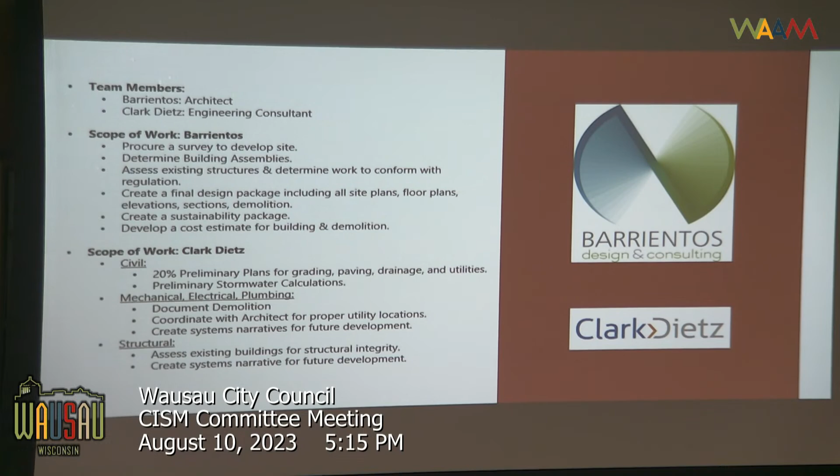Barrientos has been working with the city of Wausau for the last 5 years. In 2018, we performed a facility conditions assessment as well as a space needs study. Then in 2021, we teamed up with Mercury, and they determined that it might be more efficient if the motor pool division and DPW operations acted separately. In 2022, our team evaluated other sites throughout the city to determine the best for each scenario. And today, we are presenting our development of the repair facility.

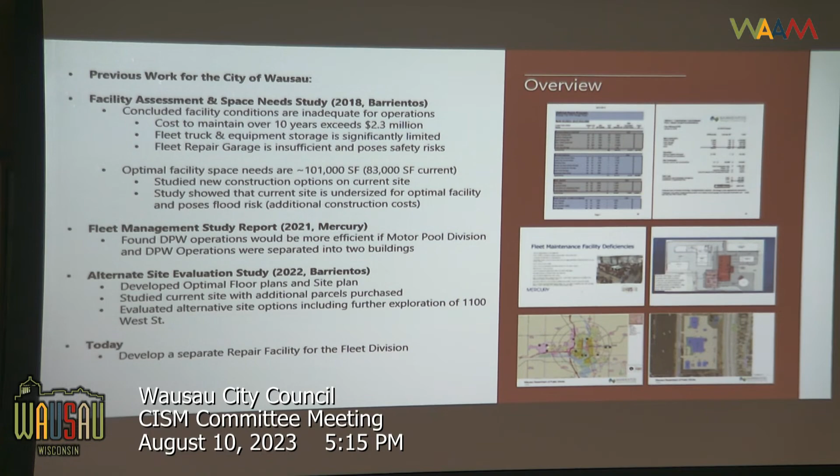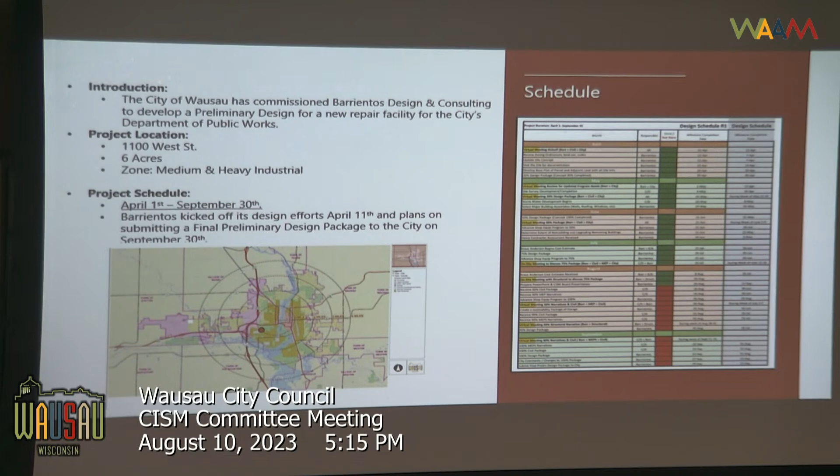As an introduction to the project, the city of Wausau has commissioned Barrientos to develop a preliminary design of a new repair facility. This location is at 1100 West Street. It is 6 acres and is zoned as medium and heavy industrial right now. Our project schedule began April 1st, and we are set to conclude work on September 30th.

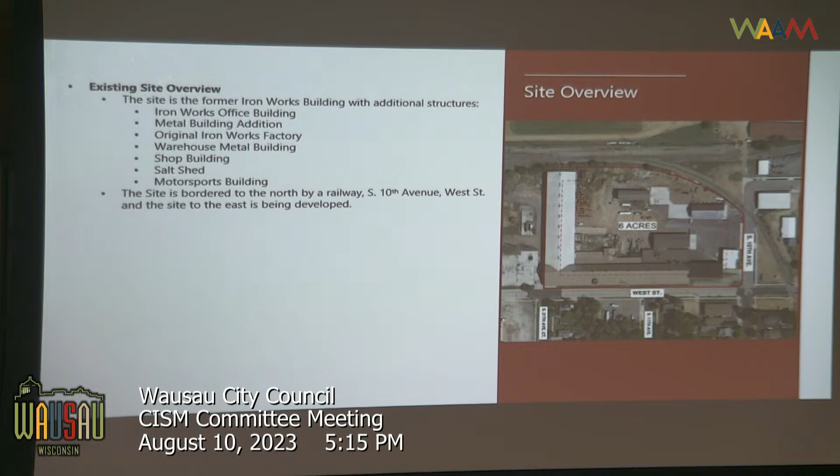The existing site, as you can see on the image, is the old ironworks. It has several building typologies, including the office building, a couple additions from a metal building and a warehouse. We have the old ironworks factory, as well as a separate shop building, salt shed, and a motorsports building. The site is bordered to the north by the railway, to the south by West Street, and to the east by South 10th.

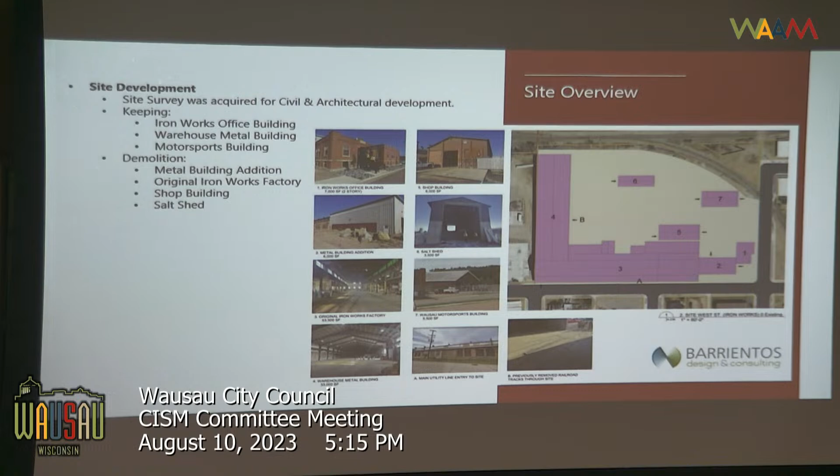Our site development so far: right now we are looking to keep the existing office building for the ironworks, the warehouse metal building, which attaches to the old ironworks warehouse, and the motorsports building, which will act as a storage shed. We are proposing to demolish the ironworks warehouse, the salt shed, the shop building, and the metal building addition.

Here's a map of the demolition compared to what we want to keep. What's highlighted in blue are numbers 1, 4, and 7. On the bottom right you can see the office building, the top right the storage shed, and on the top left the big metal frame structure. These are what we want to keep.

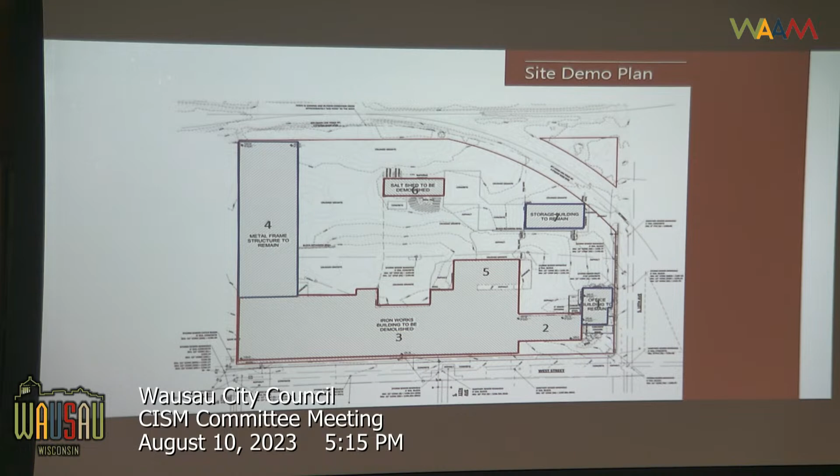And we are proposing what's highlighted in red, which is basically the old ironworks building and the salt shed, number 6.

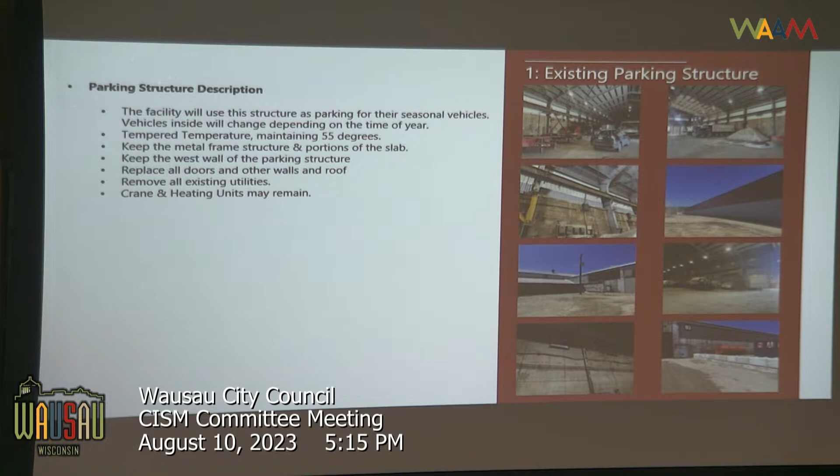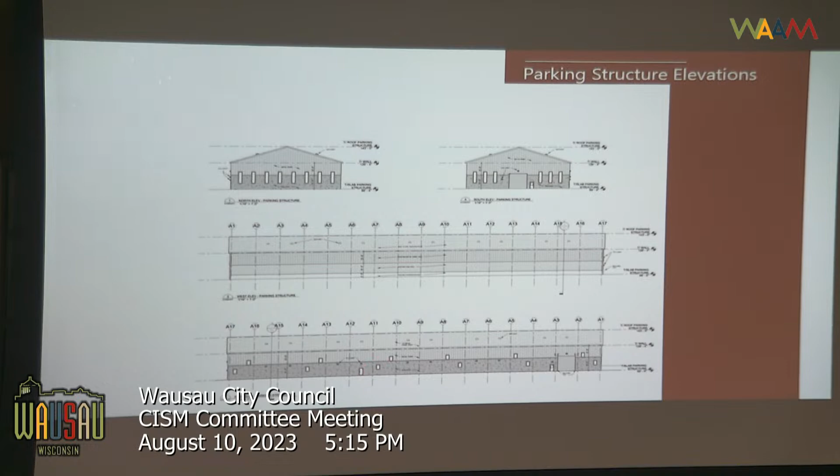All right, so we're going back to the same area—it's kind of hard to see, but now I'm going to discuss the existing office building. Basically, this portion would serve all admin and crew functions for the facility.

Our biggest determination is to make this building ADA compliant. There is no elevator in this existing building, so we would propose adding some sort of elevator or simple lift to make it accessible for anybody. The first floor, the basement, would have direct access to the shop and all the crew functions, while the top floor, the second floor, would have all administrative and private offices.

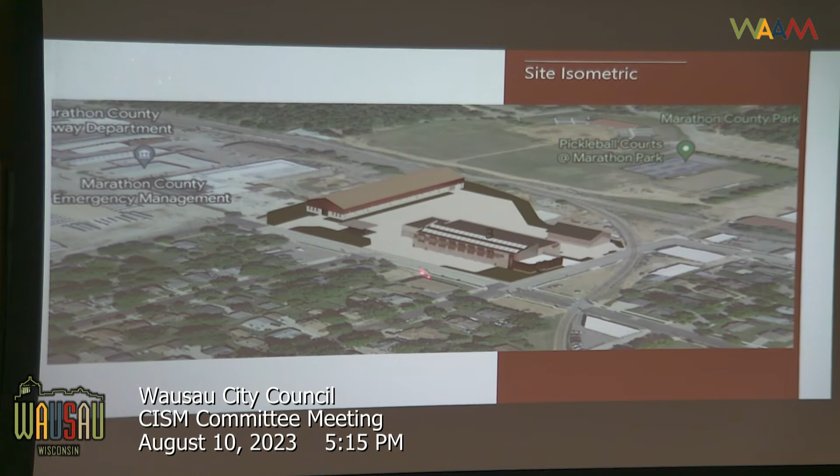So now I would like to discuss our last one, which is the big repair facility in the middle. Basically this will include all repair functions, including all repair bays, wash bays, and welding. We would like full heating and cooling temperature control, so air conditioning as well as heating in the winter.

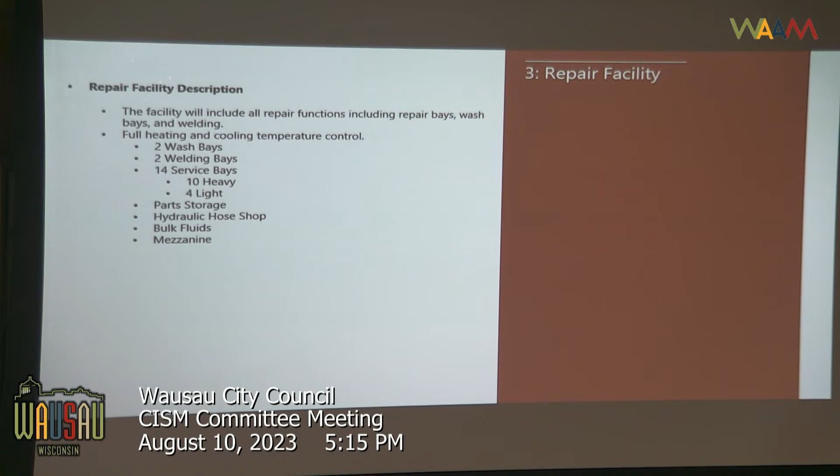We are proposing 2 wash bays, 2 welding bays, as well as 14 total service bays, which will include 10 dedicated heavy duty bays for things like plows, and then 4 light duty bays for pickup trucks. There will also be an area for parts storage, hydraulic hose shop, bulk fluids, and a mezzanine above the shops. This is our working plan. Over on the right is that existing office building, and that lower level directly attaches to the repair shop. I'll start on the left.

These are our two proposed wash bays. We have one automatic, which you just drive straight through like a car wash, with an underbody wash too, getting the bottom of the vehicles as well. This is the manual wash bay, which also might include an underbody wash, but then there's also ability for just manual washing in there as well.

Directly connecting to the wash bay, now we get into the main shop. This would be the welding area, and then here's our 14 service bays. We are currently showing 4 lifts: 2 in-ground lifts, a 4-post lift, and a 2-post lift here. Everything over here includes our parts storage and bulk fluids. We have our supervisors and file storage offices here, and then general mechanical, water meter room, and mechanical and electrical rooms as well to service the new building.

This is our first iteration of elevations. Basically what we're showing on the top is almost like a half sawtooth design. Facing the south, we would like this roof to be sloped just because in the future, if you did want to put solar panels up there, we would like to give that option for direct good sunlight facing the south. To the right, we are proposing it to be flat, which if you put it far back enough, you could put solar panels there as well. But because we want to have as much natural lighting as possible, we would like to add a clerestory here in that division, which you'll see in an image shortly.

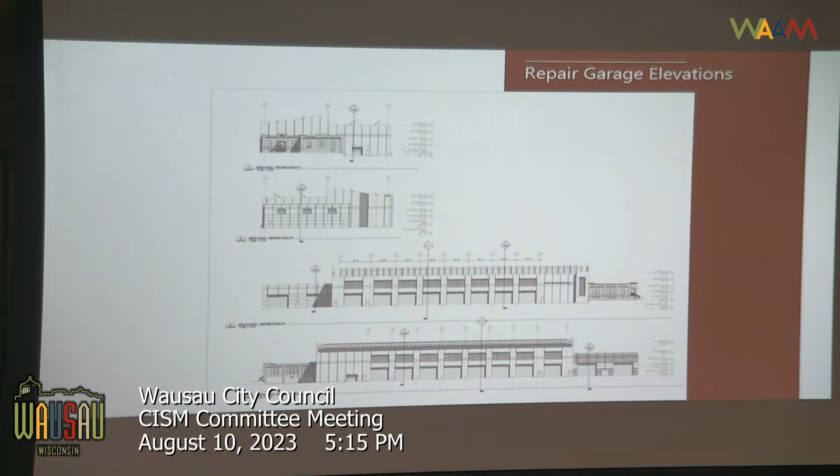So here's our first iteration of the renderings we did. We have received comments from the city, and we are currently working on making updated images just for their preferred aesthetics. But here you can see our clear doors and large windows above. This entire building would be precast preferably, and then you are showing a larger window, kind of signifying that connection of the office building to the new building.

Here is a southwest image. So now you can see the wash bay, how it connects to the building. And here you can better see that typology of what we're trying to do here with the clerestory. Here's our first interior image. Obviously, you're not seeing the structure in there yet, so this is what it could look like, with as much natural lighting as possible, as well as having that clerestory facing the north.

So these are our first iterations of the cost estimates. We teamed up with Wolverine Construction, based here in Wausau, and they performed a demolition assessment of our work in the parking structure as well as on-site paving and everything. Their total came in at $1.4 million.

To the right, you're looking at our building cost estimate. We teamed up with a construction consultant we've worked with in the past, and we received this yesterday, so this was our first time seeing these numbers. Their proposal for the total cost would be just under $24 million.

Combining all of that, we're looking at a total of just over $25 million, including demolition and building. This does not include purchase of the property or consultant fees. That is it, thank you. I'd like to open it up to anybody for comments or questions.

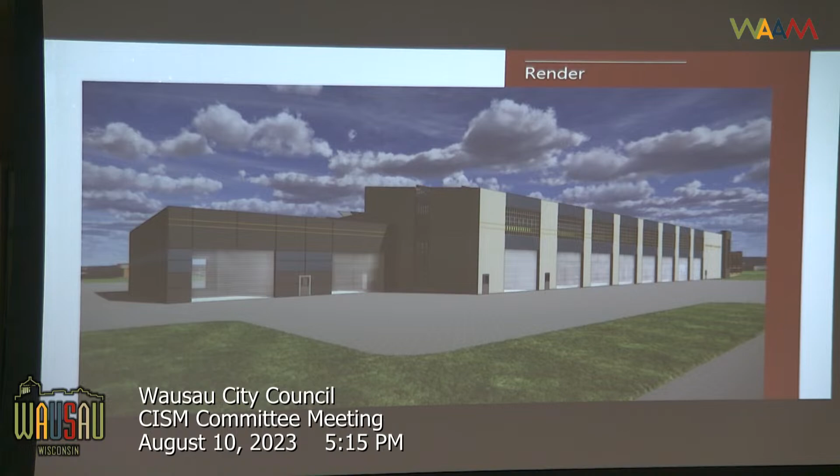Sure. Eric, correct me if I'm wrong—currently you have 8 to 9 mechanics, is that correct? Yes, that is correct. So normally our standard is to have 2 repair bays per mechanic. If we have 9 mechanics, that would be 18 total bays.

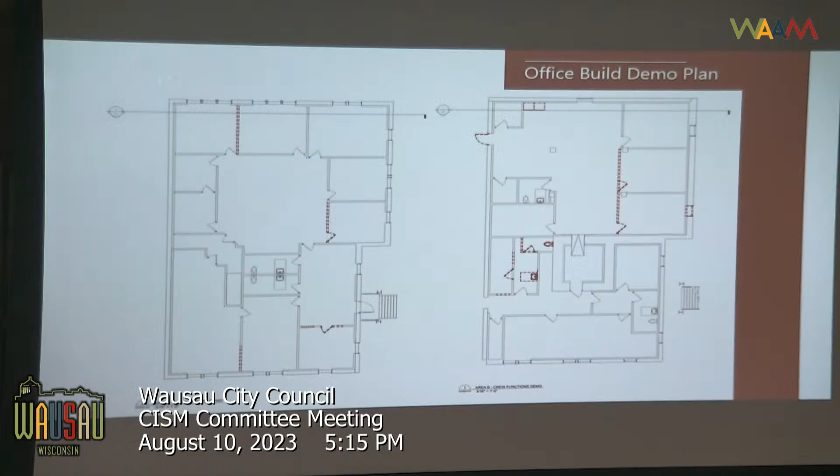However, with the width of the site—if I jump back to the site plan here—if we add bays at our standard width of at least 26 feet, that would add another 50 feet to the width of the building. And if we want the fuel station right in the southwest corner, that would compromise that section. So we went with a goal of about 1.5 bays per mechanic. With 9 mechanics, that comes out to about 14 to 15 bays, so that's where we came up with that 14 number.

Another question: when I toured the facility, one of the workers' biggest gripes was hoses laying on the floor that they trip over when doing oil changes. Eric and I toured the Peterbilt shop a couple years ago, and they had all their fluids and hoses hanging up above so nothing was on the ground. Can you explain how that's going to work in this new facility?

Sure, if you look at this image, what we're proposing is what you're talking about—all the bulk fluid lines mounted off the crane columns, which will be structural columns. Our goal is to keep everything elevated and off the shop floor to minimize that issue. We'd run those lines overhead onto the roof, then down the columns to the bulk fluid assemblies. When a mechanic needs to use it, they'd just pull it down, which should minimize its effect on the shop floor.

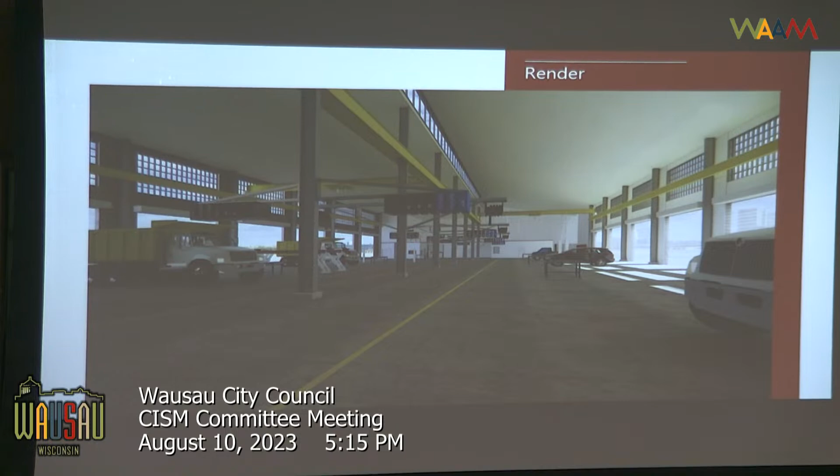Thank you. Any other questions from the floor? Just one—how many service bays are in the current building we occupy today? Was there 6? So, 6. Even from 6 to 14, what a dramatic difference.

I think in terms of size, does the current facility include locker rooms and shower facilities? We do have locker rooms and shower facilities. I wasn't sure where we were at with that. And we do have male and female accommodations at that facility now, because we've had trouble at the firehouses with that. Correct, we do have both. Okay, that's good, just to make sure we're not missing anything there. That was my only question.

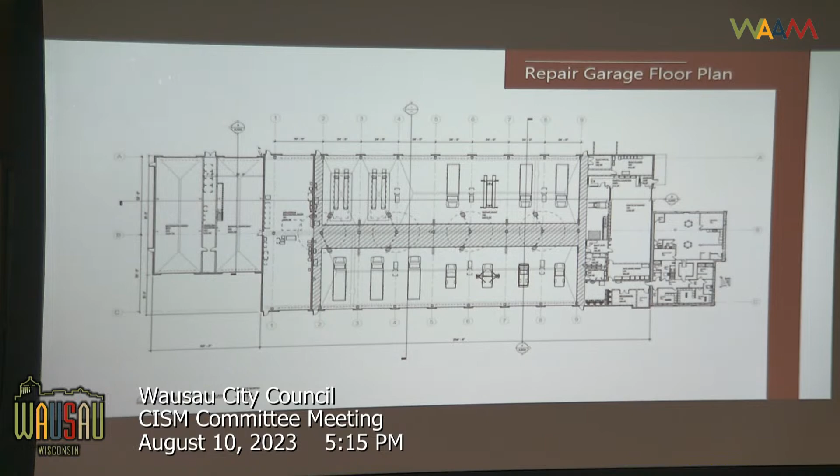Alder Diny: Just a question on the setback on West Street. The existing building is right up close to the street, and we're setting back a little further. Is that to accommodate the apron in front, or is there any way to use more of the property? Are you talking on the south side, in that vicinity? So are you asking why we didn't go up to the setback line?

Well, if you look at the existing building, it's right on the sidewalk practically. So yeah, because we're proposing demolishing that building, the reason we could keep the structure within the setback line is because we're doing work to it and refinishing it. But since we're proposing demolishing that existing Ironworks building, we'd have to comply with setback regulations for a new building. We just have to keep it within that line. Also, pushing it back this far gives us access for these pull-through bays.

It gives us enough turning radius for trucks to back in and out without going onto the street. So then with that added setback, is there space to park vehicles there? Or would it be necessary or practical to park vehicles outside the bays? I know there was discussion at the last meeting about having a drop-off location there. If the facility understood there might not be a lot of movement there, they could park trucks there. But if you park a truck there and need to back something out, it might limit the ability for the truck to get out of the facility—instead of 70 feet of clearance, it could turn into 50 feet or even less, which would make it pretty difficult.

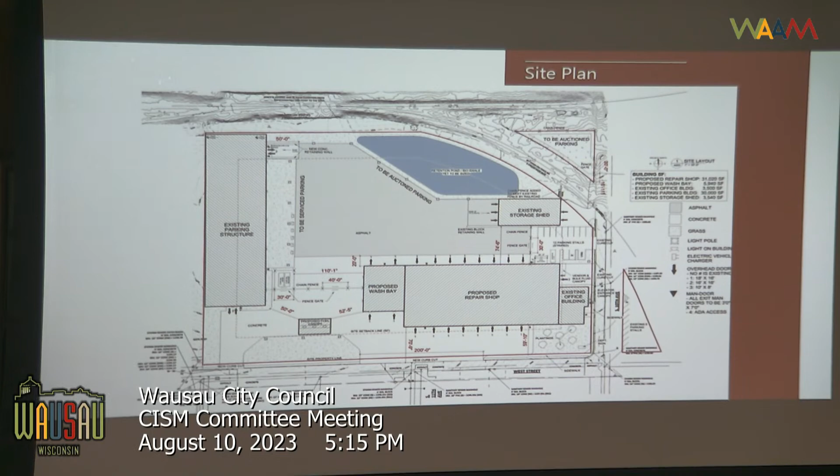I would also say thank you. I thought it was very impressive. To Eric and Dustin, this is going to meet your goals for another 30, 40 years. I'm assuming the Myron Street location will stay as is, and when this is all said and done, more of our equipment can get inside instead of being outside in the elements.

And anything else you'd like to add, Mr. Barrientos? Thank you, is that good? All right, thanks Neil. Oh, Alder Gisselman. Awesome, yeah.

With regard to the elevator to the office, I think that's really quite critical for the ADA. I don't know if it goes down -- are you anticipating the elevator not only on grade but to the upper level, what about to the lower level? I anticipate a complete elevator serving all three levels, or is it just the two levels, the ground on grade and then the first level?

Right now where it meets the street, that's kind of where you would access the elevator. It's about 4 feet below the second level and 4 feet above the basement level. So the lift would go 4 feet up to the second level and 4 feet down to the crew level -- we would accommodate all levels. Thank you, thank you.

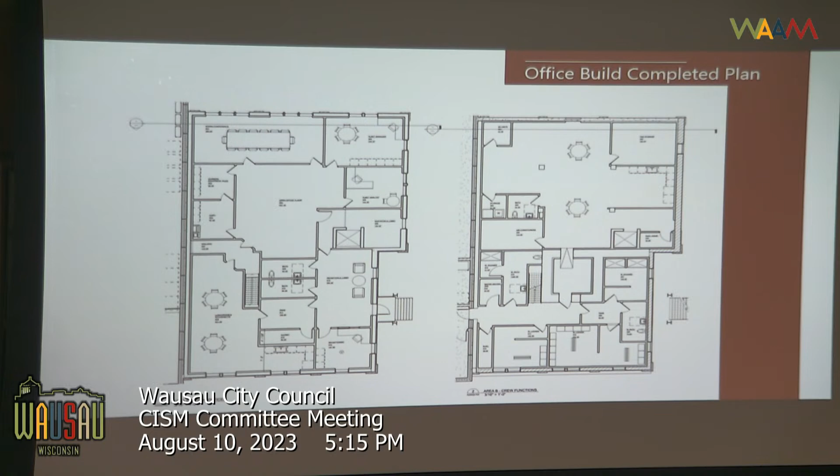I'm sorry, Don. No apology needed, Mr. Gisselman. I guess we're all excited to see how this goes, because it's sorely needed for this community. Thank you, awesome, thank you. I guess it's a presentation -- there's no action needed tonight, so thank you for that.

With that, we will move on to item number 9, discussion and possible action on parking restrictions on the 600 block of Washington Street.

Who has this? Alan's not here. Right, so I'll take this. This stretch currently has 15-minute parking. There's been a request to remove the 15-minute parking restriction and just have traditional parking spaces. Staff does not have an issue removing this restriction.

Alder Henke: was this a loading zone at one time, or what's the history of that 15-minute restriction? I don't know, maybe just a drop-off, a short-term spot -- I don't know if it was ever specific for a loading zone and changed to 15-minute in the past. I don't know the history there. Are the businesses requesting this change? It is one of the businesses, yes.

I'll move to approve this. Motion is made to approve item number 9, discussion and possible action on parking restrictions on the 600 block of Washington Street, made by Alder Henke and seconded by Alder Rasmussen. Any further discussion? All those in favor signify by saying aye. Aye. That passes.